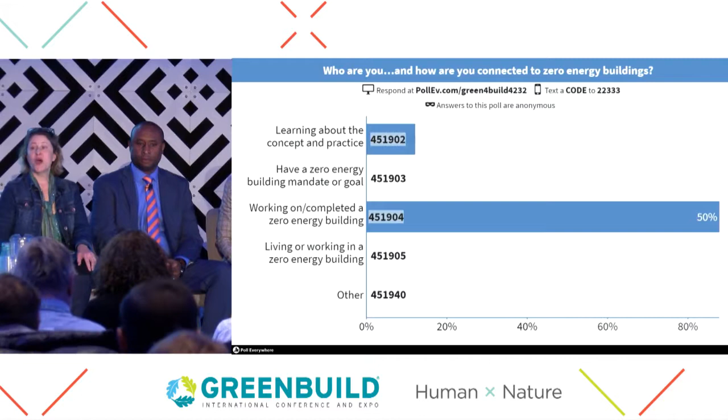We'd like to know a little bit about how you are connected with zero energy buildings and who you are. Hopefully you're a bit familiar with this texting in the answers situation, so we're going to add a little challenge to it this morning. We're going to do 2 polls at one time. So while you are texting in your responses of how you are connected to zero energy buildings, whether you're in the learning mode, finding out about the concepts and practices of zero energy buildings, whether you are part of an organization or a jurisdiction with some sort of zero energy mandate or goal, whether you are someone who has constructed or is currently working on the design of a zero energy building, or what we really want to see out in the world, folks who are living and working in zero energy buildings.

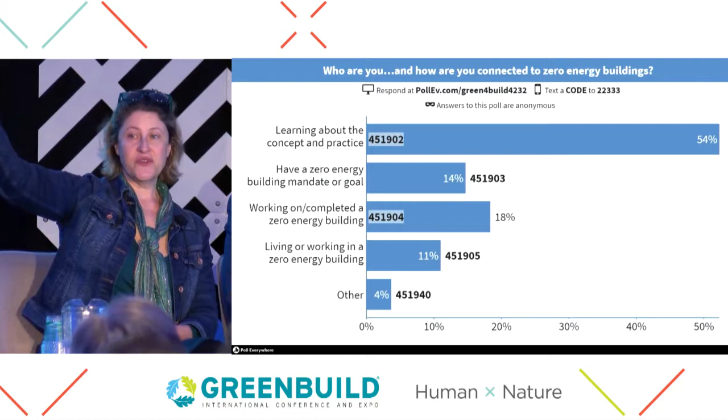So please type in your responses to that, while I also at the same time ask you to tell me who you are. So can the architects and designers out there raise your hands for us? Construction folks, okay, owners, consultants, government folks. Okay, any other people who want to shout out who they are that I missed? All right, thank you. And from our poll, we've got a lot of folks here learning about the concepts, learning how to do this, which is great. A few people with mandates.

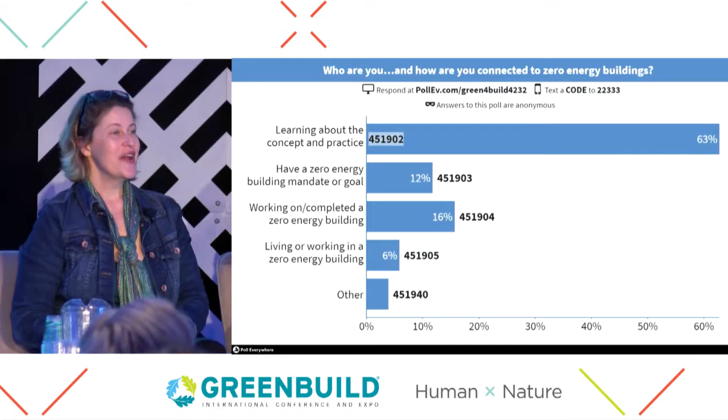Living and working in zero energy buildings. Can those folks raise their hands? Who's living or working in a zero energy building? One of our panelists is not raising his hand. Okay. 2 of our panelists are not raising their hands. Yeah. Okay. Great. Year after year at Greenbuild, this is what we want to see, more and more people raising their hands that they're actually in a zero energy building. So that's our goal.

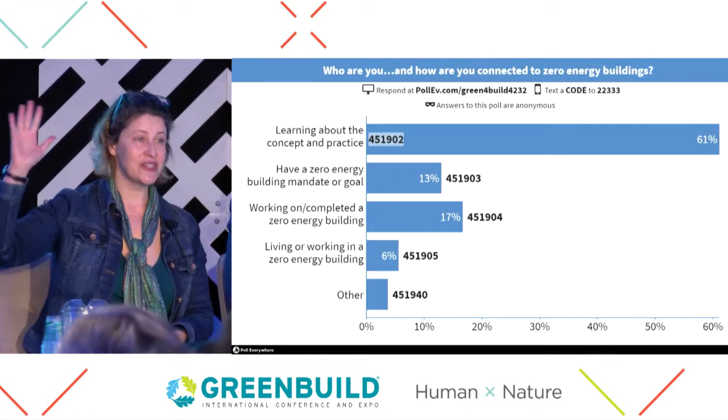So I'll start us off with a little bit of an overview. Those of you who have been at Greenbuild for the past couple of days probably know a lot of this stuff because miraculously we have had 2 tracks at this conference this week that have been focused on zero energy, which is a real testament to where this is headed and the excitement around zero energy and the practice of zero energy. So I've got to throw this in here.

I personally have seen this in at least one other presentation, and this is the zero energy building definition from DOE, and we put a lot of time and effort and funding into trying to do this work and setting the ground rules for folks so that you don't have to decide over and over again what is a zero energy building or a zero energy community. So this is: the delivered energy to the building is less than the on-site renewable exported energy on an annual basis.

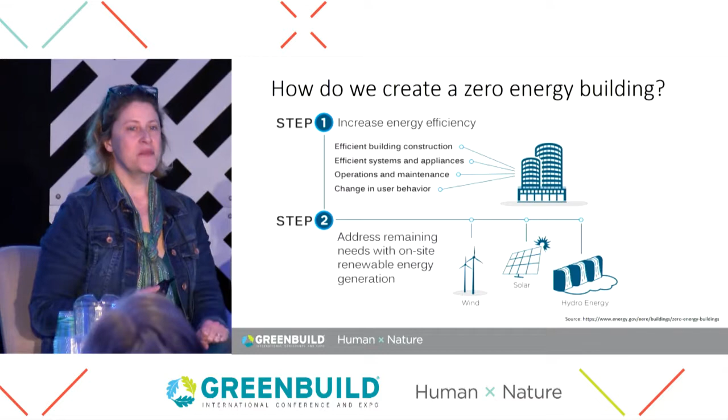And of course, just setting the foundation here, I sit in the energy efficiency part of Energy Efficiency and Renewable Energy at DOE. So this is near and dear to my heart, just keeping that efficiency as high as possible, keeping that EUI down and making that the primary focus of our buildings before we do the renewables work.

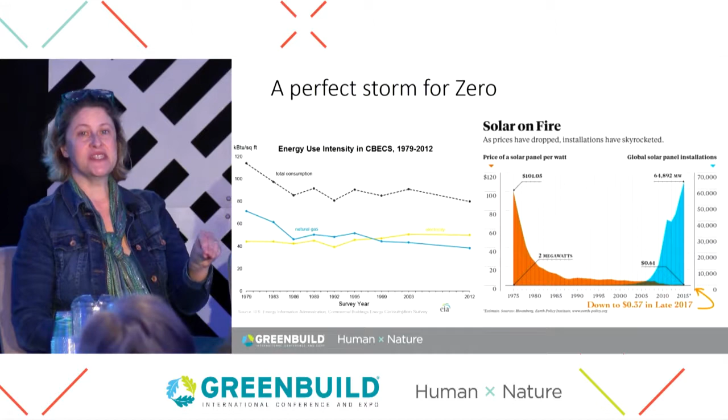It's certainly a perfect storm for zero energy. Right now, you can see the graph on the left here is showing us that our EUI, our energy intensity, is going steadily down in commercial buildings in the United States. Meanwhile, the cost of panels is just plummeting, although we did hear in the previous session, if y'all were here at 8 o'clock this morning, that the price has gone up a little bit recently because of the tariffs, but we have this steadily decreasing panel price and therefore the resulting dramatic increase in solar installations.

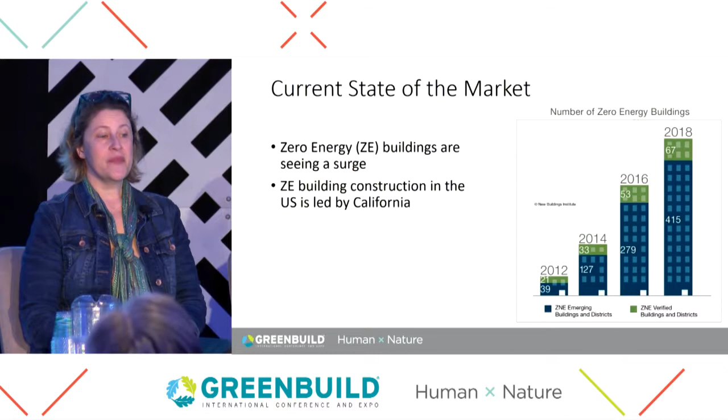This reminds me of graphs that we saw 12 years ago or so at Green Build conferences when we were talking about LEED certifications. And now we're looking at the same kinds of numbers, hundreds year over year of zero energy buildings coming onto the market. California is really leading the charge here with the number of zero energy buildings. And let me scoot back here one slide if I can.

And the education sector is also leading the way with K-12 schools, and Shanti's going to speak a little bit about that as well. And certainly the interest is there. We're seeing that at this conference, and we're hearing that from the market. 80% of 1,200 respondents surveyed recently stated that they are planning a zero energy building in their portfolio. That's up from 29% just 5 years ago. So a lot more interest, a lot more awareness of what's out there.

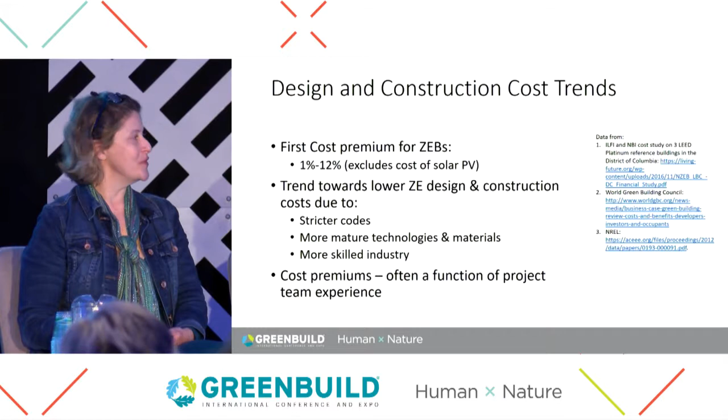And we are seeing those costs come down. Again, akin to LEED certification, we're seeing a workforce that is more familiar with these concepts. More and more folks know how to do this. And we have stricter energy codes that are kind of putting that energy efficiency foundation in there as a law. And then we can move to renewables. So just a lot of beautiful factors coming together to make this the right time for zero energy.

And luckily, we're also seeing really nice trends in occupancy rates, higher rental rates and rental values, and higher sale values for these zero energy buildings. So there's money behind it as well. So we're going to be breaking the rest of this session down into doing zero small, looking at bank branches. You're going to see there's more to what Suncoast is doing than just bank branches. And then we'll have a piece on doing zero big with distribution centers, fulfillment centers, and then doing zero right with Shanti. So without further ado, I'm going to turn it over to you, Bakari, and take it away.

Thank you very much, Holly. And good morning, everyone. Thank you for coming out this morning. I'm very excited to be here at Green Build. This is my first Green Build, and I'm happy to represent Tampa, Florida. Is there anyone else here from the Tampa Bay area or Florida? Okay, we have a few other souls that braved this cold weather. Again, thank you for coming out.

So weather is a huge factor for us when we're designing net zero buildings. Florida's hot, humid climate, the requirements for air conditioning and humidity control is a big player in our energy use. And today I just want to go over some of the strategies that we're using for small branches, medium-sized buildings, and even some of our larger buildings. So Suncoast Credit Union is the largest credit union in Florida. I am the director of facilities for Suncoast, so that pretty much means I manage a lot of our buildings, and also I'm part of the building team for the construction of our new buildings.

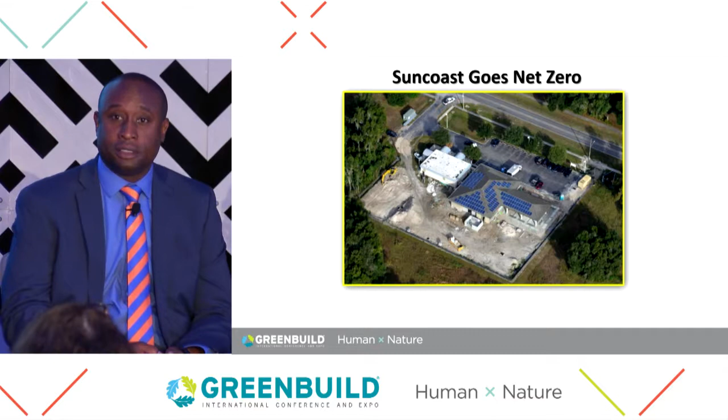And when we first started looking at what we call our green buildings, these are buildings that have 100% LED lights, buildings that have low E windows, geothermal heat pumps. The goal was to make sure that we're building buildings that are better for our overall environment. And we started with small 4,000 square foot branches in places like Bushnell, Florida. So here in Bushnell, Florida, this was the first solar building that the community had ever seen. Bushnell Utilities, the local co-op, had no other solar installations. So net metering, bidirectional meters, these were all new to this community. But since that time, since 2013, we've gone ahead and built over 13 additional solar-powered branches throughout Florida.

And we've seen the cost of the overall solar go down quite a bit. So in 2013, we were looking at $2.50 per watt. In 2017, we're now down to $1.80 per watt. So for a typical 4,000 square foot branch, the cost in 2013 was over $100,000. Now we're down to around $70,000, $80,000. And what that means for us is that the payback is somewhere around 11 years on a 4,000 square foot branch.

One thing that's very attractive to us when we're installing solar is that our members, the local community, may not understand the LED lights a whole bunch. They may not see the geothermal heat pumps, but what they do recognize is the solar. And getting that message out about sustainability, about renewables, is very important to Suncoast. We want it to be part of the vocabulary, really, of our communities. Part of the overall conversation when people are driving down the road. What is that, and what is that for? Those are our solar panels, and they help us make our buildings net zero.

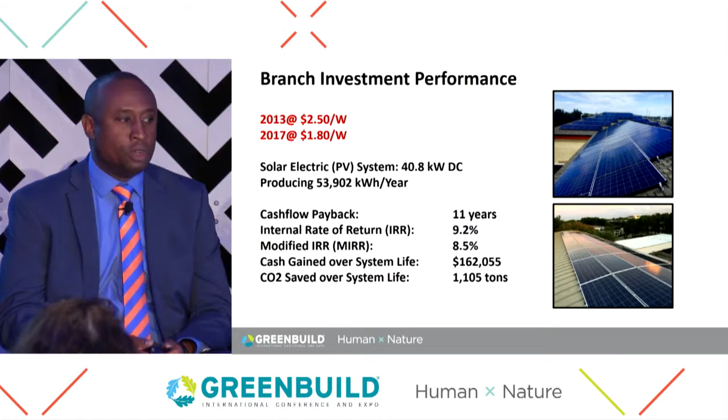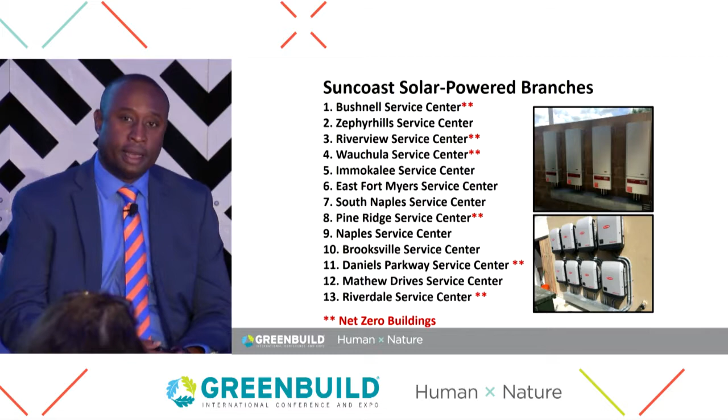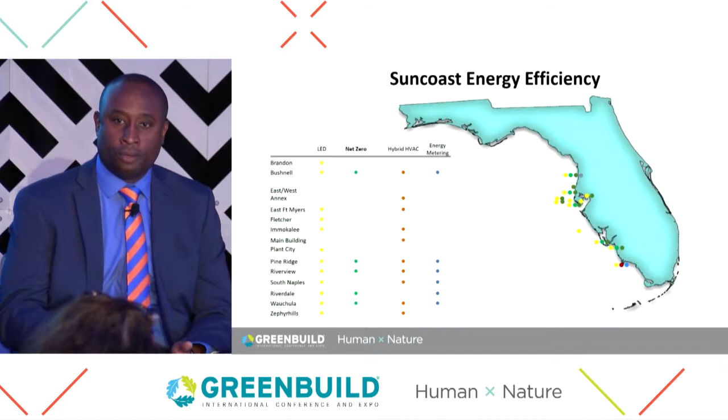So today, we have about 13 different solar power branches. Six of those are net zero buildings. So throughout the year, we are producing more electricity and providing it back into the grid than we are receiving. And this is throughout Florida. And Suncoast has recently been allowed to branch out throughout the entire state. So we have huge plans for the next 5 years to put buildings throughout the rest of Florida.

And what this means for us on our electric bills: a typical building of this size is somewhere around $1,500 to, say, $2,200 a month. When we have our net zero buildings, we're looking at only really the cost of the commercial charge, $11 per month. So here's a 4,000 square foot building where the electric bill is $11 per month. And these are other examples of buildings that we have. Again, the cost, $22 per month. That return on investment, somewhere around 11 years, which is really a great investment for our company.

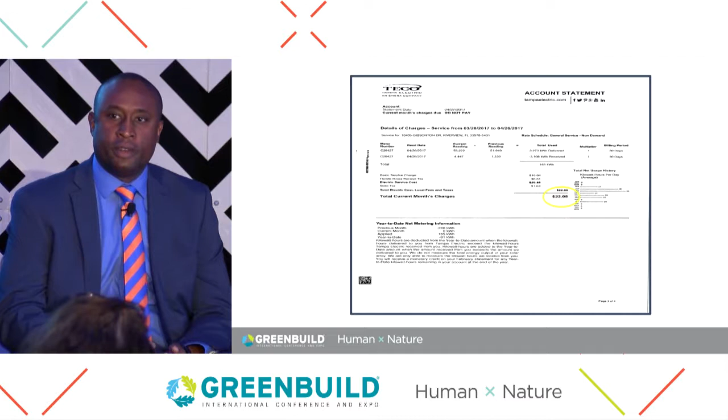So we started off with 4,000 square foot branches and really started looking at, okay, let's do things even bigger. And we began designing, in this case, a Fort Myers service center that is a 10,000 square foot service center and a 7,000 square foot training center. And we wanted to make use of that entire facility. So here's an example of a retention pond on site. We couldn't park on it. It's simply used for our storm runoff. And with a variance from our local water management, we were able to install solar on the retention pond. So there are locations throughout Florida, even your own communities, where there's a great opportunity, if there isn't enough roof space, to put field mount systems.

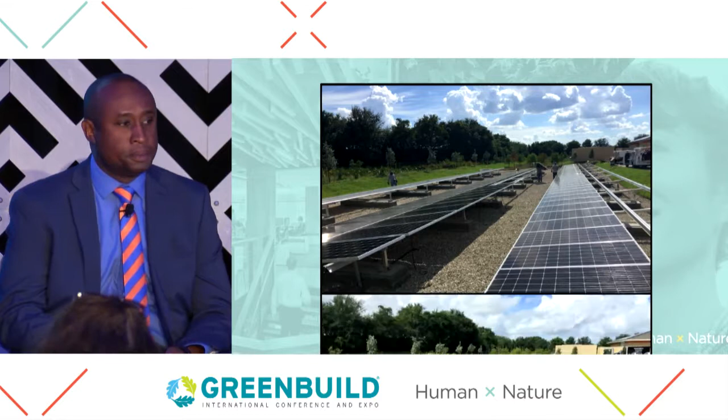So again, we're making use of the rooftop, the drive-throughs, the field mounts. And so this overall campus of 17,000 square feet is also one of our net zero buildings. And what we really love is that when you walk into our net zero building, it's cool, it's brightly lit, it has all the equipment that is standard for one of our branches. And these are very, very busy buildings. You can imagine a lobby full of people on a Friday, all the transactions, the doors always open, and this is still a net zero building.

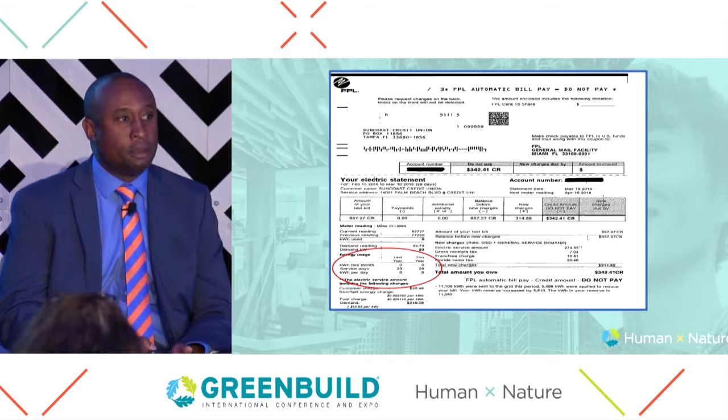So in this case, again, you see 0 kilowatt hours per month on the utility bill. You will see a charge somewhere around $271 for our demand, okay? But again, we're overproducing enough that we're getting an overall credit for this building. So reducing that demand charge, which is sometimes a third of my electric bills, is very important to me. So I'm investigating battery storage and how I can use it to help reduce that demand. Overall, we've reduced our electric bills on our branches somewhere around 10 to 15% over the past few years. And this is the total usage of our electricity while adding about 5 branches a year.

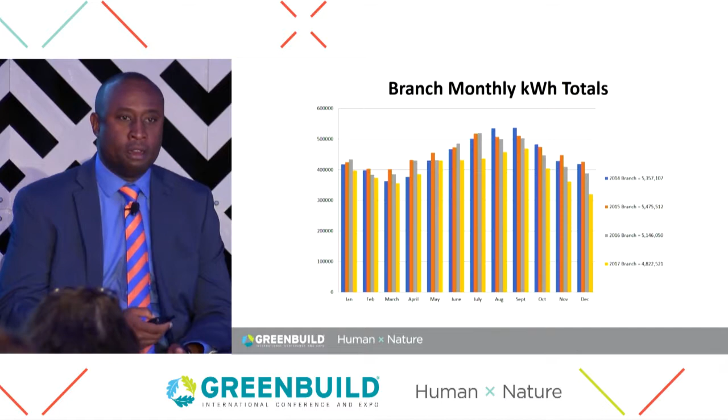So 4,000 square foot branches, 10,000 square foot branches. Now we're looking at a 30,000 square foot call center right in Tampa Bay, Florida. And this system is a 400 kW solar array. This was an existing building. So this was a challenge because a lot of the sustainability initiatives that we have at our branches, the low-E windows, the insulation, the geothermal heat pumps, were not applied to this building when it was built in 2005. So this solar array reduces the overall energy use by about 70%, saving me about $70,000 a year. This building has a standing seam metal roof, one of the best applications for us because we don't have to penetrate that roof.

So the chances for leaks from storms becomes very, very limited. And when you speak about storms, we're in an environment where we have hurricanes every year. And when Hurricane Irma came through, with our 13 different branches, 15 buildings overall with solar, not a single solar panel was lost on a single branch. That's all just smart installation. Now, there were some other projects throughout Florida that were hit pretty hard, but it's all about smart guys doing the right thing and making the choices on how they're clamping down those panels.

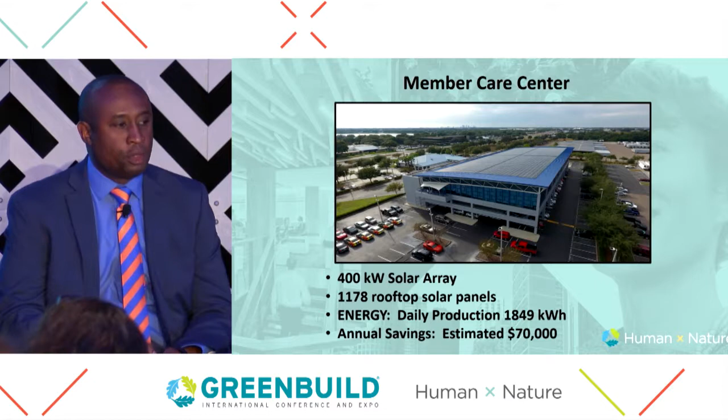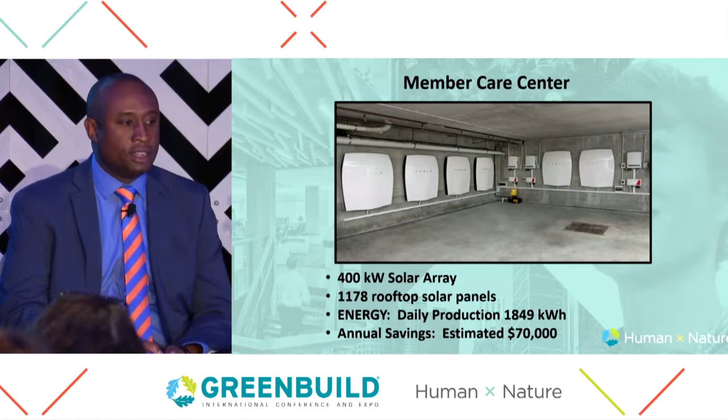Again, a 400 kW solar array saves us about $70,000 a year. Now, that building was not a net zero building, but again, my goal is to start looking at battery storage, the Tesla Powerwalls, and seeing how we can incorporate those to help reduce that demand. And another big part of what we do is really, again, showcasing to our members and to our employees sustainability initiatives. So this was the second floor parking garage where the inverters for the solar array were installed.

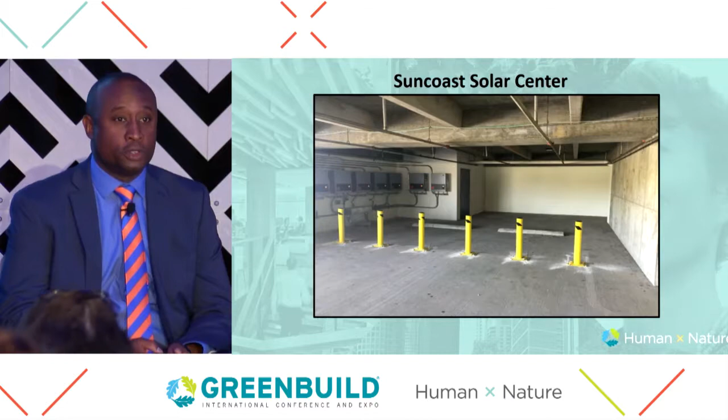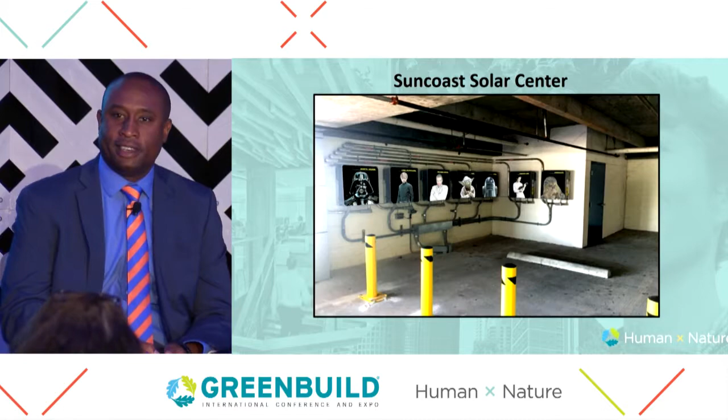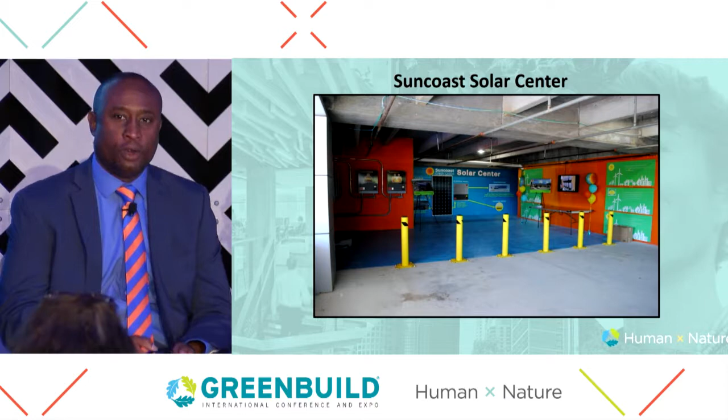And initially, we were thinking about a design of Star Wars figurines for these so that kids could come up and take a look, but our marketing department got involved and they said there were some copyright issues, so we didn't do that. But what we did do is wrap that entire space. For a very small cost, I think it was probably less than $15,000, we were able to wrap this entire space. We mounted one of the actual solar panels, and we bring kids from local elementary schools, we bring students from USF and other colleges, we bring students from tech schools, just to give them a chance to get a feel and to get excited about solar.

But we wanted to improve and do even better. 4,000 square foot branches, 10,000 square foot branches, 30,000 square foot call centers. Well, we recently opened up our new 108,000 square foot administration building in Tampa Bay. And we wanted to focus on a lot of the initiatives that we look at when we look at LEED, WELL, and Living Building Challenge: low VOCs, 100% LED lighting, a lot of daylighting, floor-to-ceiling windows to help our employees be more productive. The floors in this building actually have recycled glass in the terrazzo.

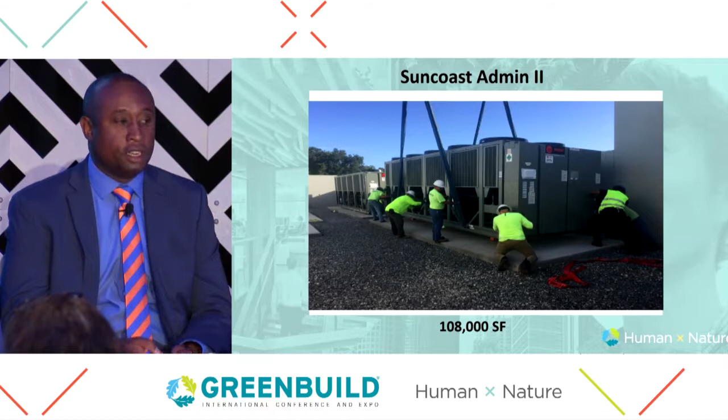Again, low-E windows. It's just amazing to walk around this building and you don't feel the heat on a 90-degree day on the inside of the building on the other side of that window. And we wanted to make use of a lot of the trees that were cut down during the construction of this project, and we reused those trees. We made sure that our AC equipment were Trane stealth high-efficiency chillers. And of course, we covered the entire rooftop with monocrystalline solar panels.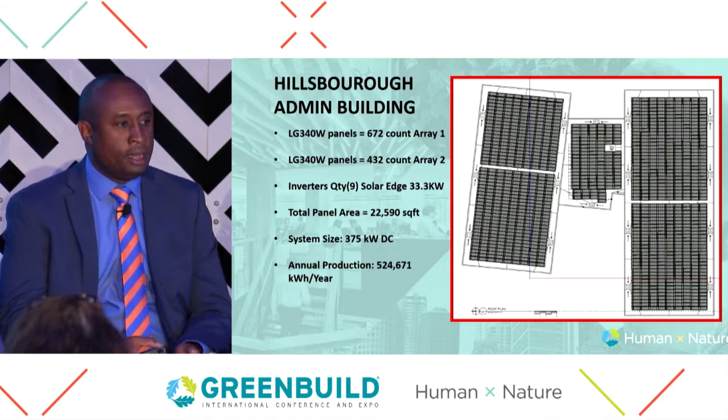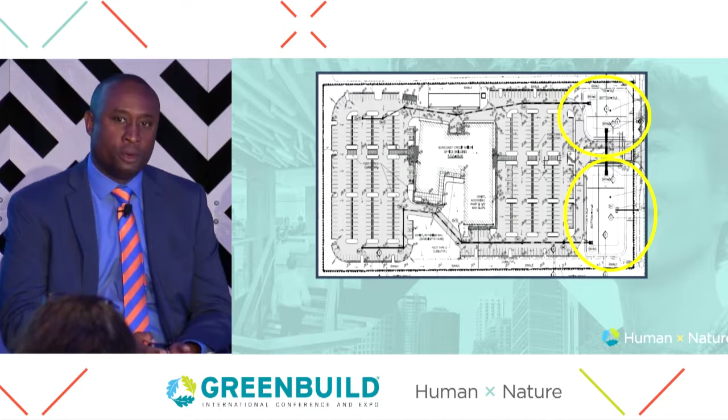Another 400 kW system, the 5th and 6th largest solar arrays in Tampa Bay. And really for Florida, that's a real shame. I mean, 400 kW should be pretty much standard on a lot of these commercial buildings. Be it metal seam roof, PVC, TPO, the opportunities are there. So this building, we're just now getting in our first electric bills. Not sure how close to net zero it will be, but I'm already looking at a budget to perhaps put, again, field mount systems in 2 ponds out front to make sure that we're definitely net zero.

Again, for Suncoast, sustainability, green initiatives are a big part of what we do. We are building buildings that are smart for our local communities. And we also want to showcase to all of our members, especially our commercial members, that your own buildings, be it a church, be it an auto mechanic shop, a Wendy's franchise owner, this is something that you can do to make your building better and more profitable.

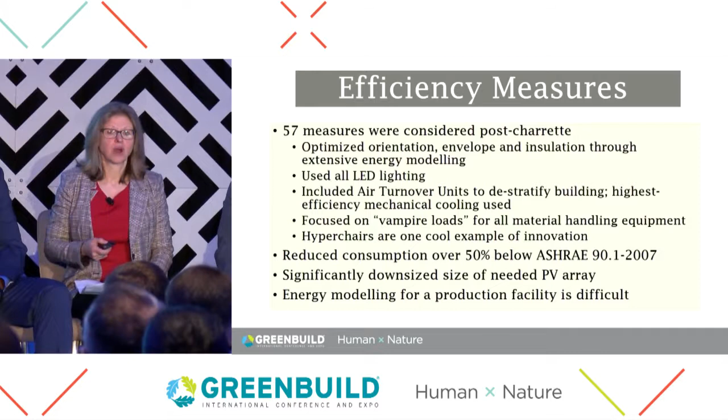So again, we had a lot of great ideas out of this charrette. Highly recommend this kind of approach to your project. Bring everyone in and really brainstorm. And we brought a lot of the ideas through to the end design.

What I wanted to talk about a little bit here was how we knew that we needed to consider water. And while DCs are not big water users, one thing that we did right away was we are using non-evaporative cooling in the DC. So it's not HVAC in the main floor. Obviously, there's air movement and non-evaporative cooling of the air that we're feeding in. And that saves enough water for 20 homes in a year. But we knew we needed to go farther.

So what we did was we partnered with the Bonneville Environmental Foundation and the Nature Conservancy to fund water restoration certificates that provide restoration of the Verde River water for recreation, by the way. So it's really a great tie-in with our function as an outdoor retailer, as we're helping people in that area get out to recreate on the waterways.

And we're also helping to be more efficient in the region on the watershed with irrigation water use. There's a lot of innovation in that area with the farmers and how they use their water. And what happened was this actually has become a LEED credit. It was an innovative new approach at the time, but now it's become a LEED credit for using water restoration credits for your building. So that was really exciting, and we continue to see great results from our work with the groups in that area on our water.

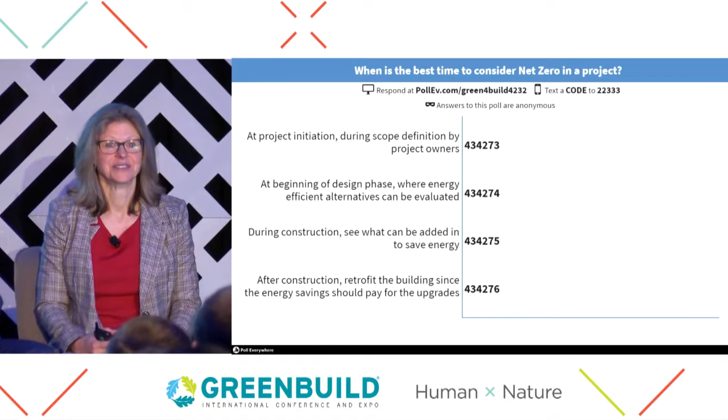Oh, this is your poll. Okay, do you want me to? Yeah. Sure. So we all gave questions, and mine was, when's the best time to consider net zero in a project? Extra credit. Hopefully an easy one. At project initiation, during the scope definition by project owners, at the beginning of the design phase, during construction, let's just wing it. Maybe I'm giving you a judgment there. And after construction, retrofit the building, since the energy savings should pay for the upgrades.

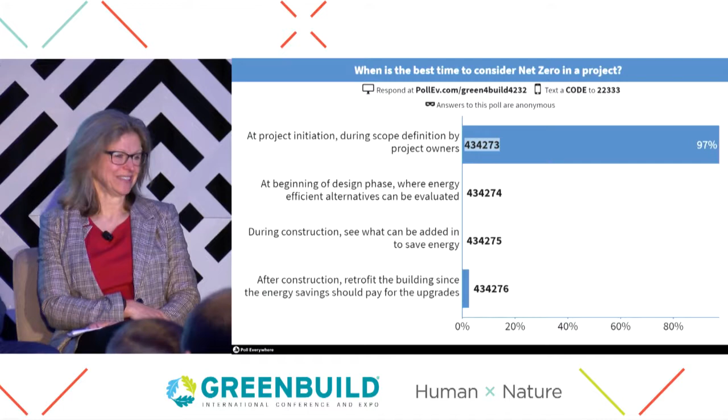Very good. We don't know how many of you are participating, but you're all right. Well, there's not an option for all of the above. After construction. We've got an after construction. All of the above, yes. That's what I would have. All of the above. Should have put that in. Never a time not to think about it, right? All right. So we'll turn it over to Shanti.

Thanks all for sticking around for the last session of the last day at Greenbuild 2018. Last time I was here was at Greenbuild in San Francisco, where I got to talk about this building, the design process. This is our own net zero office building at the National Renewable Energy Laboratory out in Golden, Colorado. I'm an energy efficiency and zero energy buildings researcher there. So this is my laboratory, if you will. I've got 1,300 office employees, guinea pigs for my research in this building.

And so we learned a lot about the design process. We came to Greenbuild in San Francisco, however many years ago that was, and talked about how we got there in the design trade-offs. So now, we've got a new net zero building. You hand it over. How do you actually operate long-term at net zero is a lot of what we've been working on and understanding. Once you have a really aggressive LEED Platinum net zero building, can you actually operate it as design intended, right, long-term? So we learned a lot over the last 4 years.

We have been operating at net zero energy according to the DOE definition for net zero for the last 4 years now. The 2.4 megawatts of solar on our parking and on our rooftop there for that office building is necessary long-term for us. And we have a little bit of extra space if we ever needed to add more. Your strategy about being adaptive and adding more solar if needed to get to net zero if you can't get the efficiency right.

I think one of the key strategies that we have learned is this idea that there's this emerging role of zero energy building operators, someone that's ultimately responsible for saying yay or nay, is it net zero or not, right? And so there's a range of things that zero energy building operators are doing around benchmarking, finding faults, fixing them. It seems to be a continuous opportunity in all these buildings to make sure every time someone wants to plug something in, it's the most efficient option there is on the plug load side, and the procurement. Making best friends with your data center manager goes a long way as a zero energy building operator to make sure that they're making the right choice on IT procurement, through engaging 1,300 occupants and keeping them happy, productive government employees.

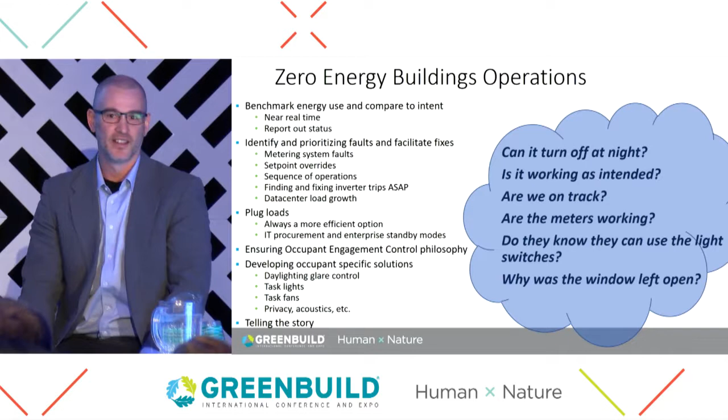And then there are 400 plus operable windows that the occupants can use, and that's an ongoing challenge to keep all those windows managed. For those of you sitting in the back there, you can see that screen with the water. That's actually this same building here. So it's cool that we get to continue to contribute to the images there.

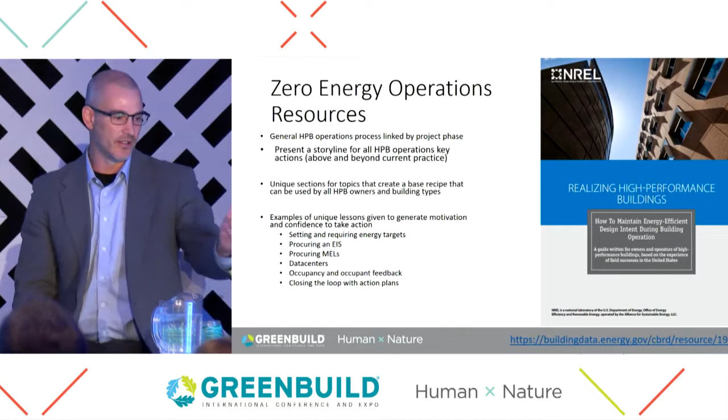And so it's not just us trying to get to net zero in one building. As a researcher, part of my job is to learn about high performance and net zero and then tell the world about it. And so one of the ways we do that is through our publications, things like Zero Energy, realizing high performance buildings, how to maintain energy efficient design intent during building operation, everything we're talking about. So lots of strategies on how others can do this from everything we've learned. See a link to that.

But the most common question I get as an occupant and a zero energy building researcher is how much more did it cost? Right, and so we've heard a lot about cost, and seeing this scale is cost-effective solutions. And so I wrote a publication here about cost control strategies for zero energy buildings that reviews the procurement lessons, the design modularity, cost trade-off approaches, and then some of the innovation we're seeing in the construction industry, things like prefabbing and modular design that allow us to build these high-performance buildings faster, which saves money for things like LEED Platinum and Net Zero.

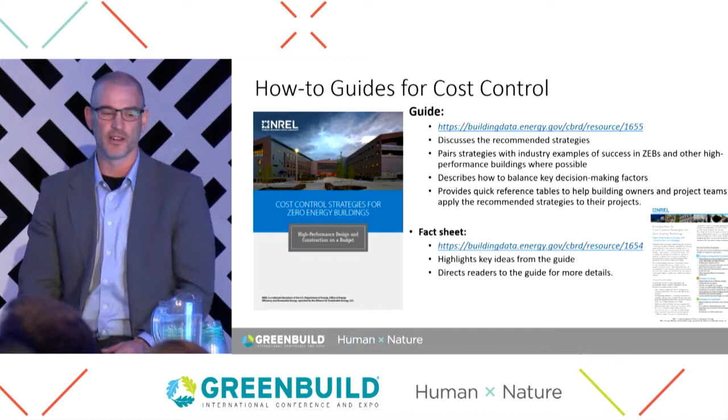So that's our own experience in one building, but we also contribute to the greater good here around zero energy for schools. And so I want to point out my colleague here, Paul Torcellini, if you want to raise your hand, Paul. He was the chair of this recent design guide called Advanced Energy Design Guides for K through 12 schools, printed and developed by ASHRAE, AIA, USGBC, IES. He's holding the design guide. He always takes it with him wherever he goes.

One of our principal researchers at NREL, he chaired this committee funded by the Department of Energy to basically create solutions for every single climate zone across the United States, showing that net zero schools, new and major renovation, can be done and should be done now. Pretty much every new school in this country should be net zero. That's basically what it comes down to, and our professional societies are contributing these best practices, case studies, examples of how to do this nationwide, so that we can all get on the same page here and help our school district partners figure this out.

And so find Paul after this, and if you ask him a good question or convince him that you need that hard copy, you can take that home. We got a couple extras there, so he'll dole that out for those that will actually use it. So find him after this.

He's also chairing the next round of these guides. It's for small and medium offices. So the 90% peer review will come out here on December 1st. It'll be open for 2 weeks. If you want to contribute your expertise and your understanding, I think we might get a good case study from your office building down in Florida. It's pretty difficult, so maybe we could leverage some of that.

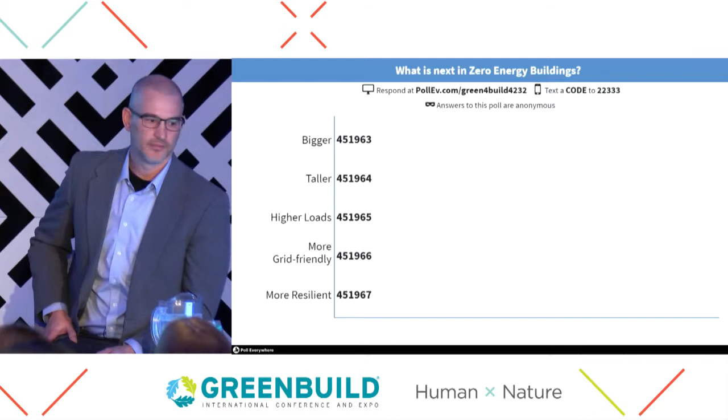All right. We wanted to leave a nice chunky bit of time here for folks to ask questions, share examples of your work, and so forth. So, Mike, here we go. Do you want a couple more slides? Do you want to do those? I would like you to do them. Okay. So, final point here. Sorry. We got 15 minutes. I'll get through this in a few minutes here.

No worry. Looking forward, I think it's also helpful to look back at what we've all done right over the last 4 years. Going forward, it's also helpful for you all to think about future green builds and future work here. Approaching net zero energy to me means how many of us are going to work in net zero office buildings and live in net zero homes in the next 10 years.

Multi-story lab in Riverside. And so because of that commitment, you start to see large-scale net zero high-load buildings like this. We see laboratories, we see hospitals now thinking about zero energy, and even going more vertical. Here's a great example of where we're at in the zero energy buildings industry. It's not just low-rise or a couple stories of schools. It's a 6-story office building that just opened up last month in Washington, D.C..

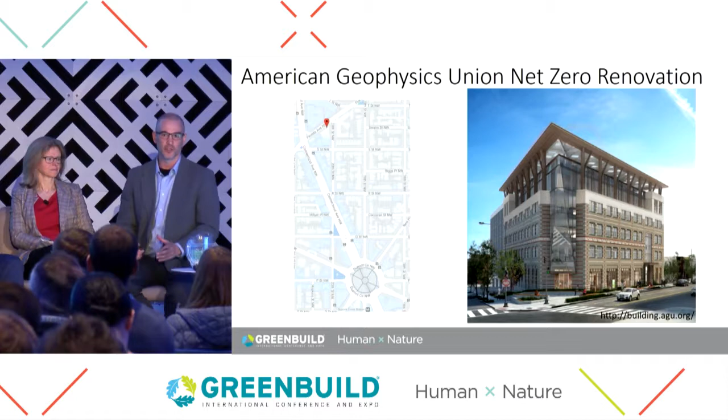Great. Now can I jump in, interrupt? I'm good. And we got 13 minutes left. Yeah. Great. Thanks, Saul. Thank you.

So I just want to use the last few minutes here for questions, comments, stories. Marla, I'll run over to you first. I'm sure we could probably spend an entire session on lessons learned, but I'm just curious if any of you have at least one major lesson learned or takeaway that we could learn from your wisdom.

So one lesson learned that we found when we're designing a building to closely match the building loads is that through our building management system and our energy management systems, we have to really pay attention to those on a daily basis. Because all it takes is a couple of days where an inverter goes down, you have a couple strings down, well, now you've lost that net zero for that entire month, and really you've lost it for the entire year. So there is a plus to overproduction and maybe adding 10 to 15% additional solar. When you design very tightly, you have to be careful that you're on it every single day.

Yeah, I think I would add, certainly that's true. And then what you mentioned, Shanti, is to go back and really make sure in your commissioning that everything's working, that you're getting all your data and staying on top of it.